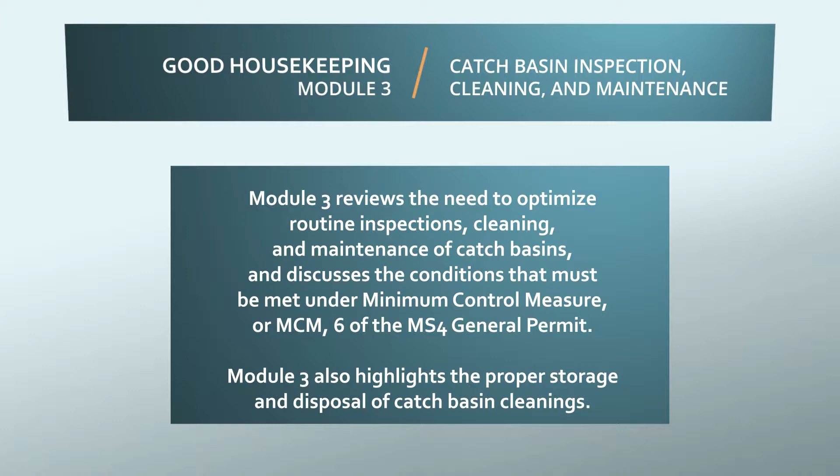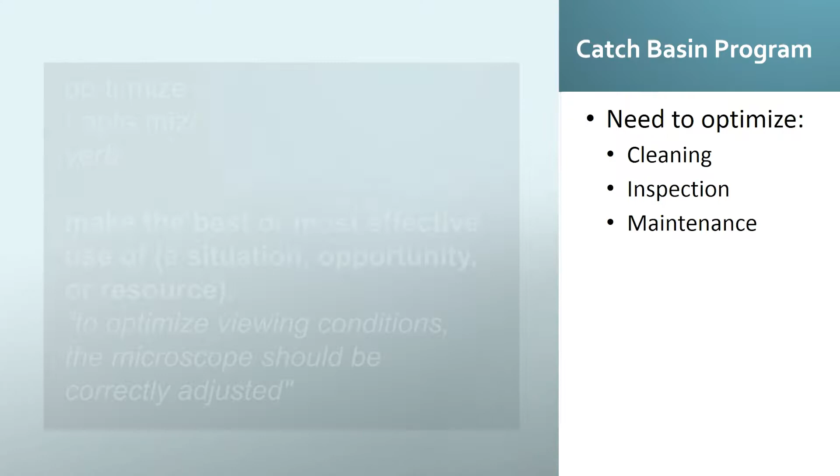Module 3 is on catch basin cleaning, inspection, and maintenance. Your catch basin program needs to optimize the cleaning, inspection, and maintenance of catch basins. Optimize is the key word here—you need to make the best or most effective use of your catch basin cleaning program. That is the definition of optimize.

In MCM 6, one of the requirements is to develop an infrastructure operation and maintenance plan, and included in that is your catch basin program. The Central Mass Regional Stormwater Coalition has developed a template for an infrastructure operation and maintenance plan. It's pretty basic, but it is a start—something you could use as a reference to get started. A lot of customization would be required, but it's a good starting point.

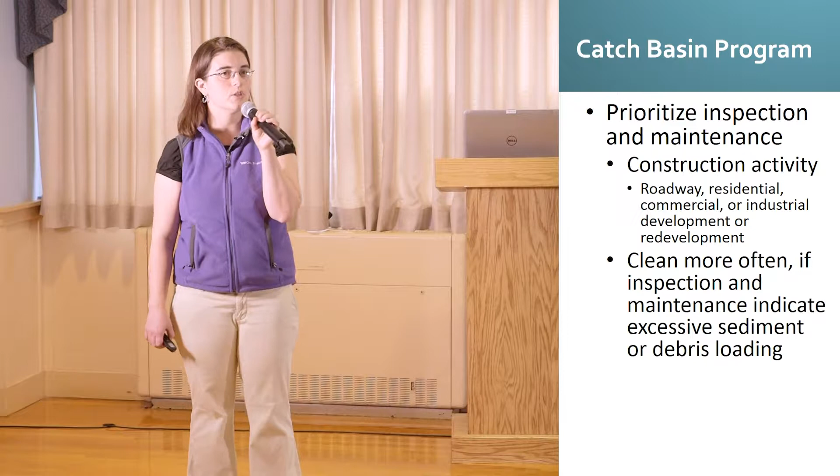Under your catch basin cleaning program, one of the key things you need to do is prioritize your inspection and maintenance. The MS4 General Permit lists certain areas that you need to prioritize, such as areas of construction activity, for roadway, residential, commercial, or industrial development and redevelopment. You need to clean any of your catch basins more often if your inspection and maintenance indicate excessive sediment or excessive debris loading.

Excessive sediment or debris loading is anything greater than 50% of your sump. If the sump is more than 50% full, that's considered excessive, because it will decrease the capacity and function of your catch basin. Part of the sump provides some treatment—it collects sediment in the bottom. So if it's too full, the flow will pass right through and there'll be no deposition of the solids.

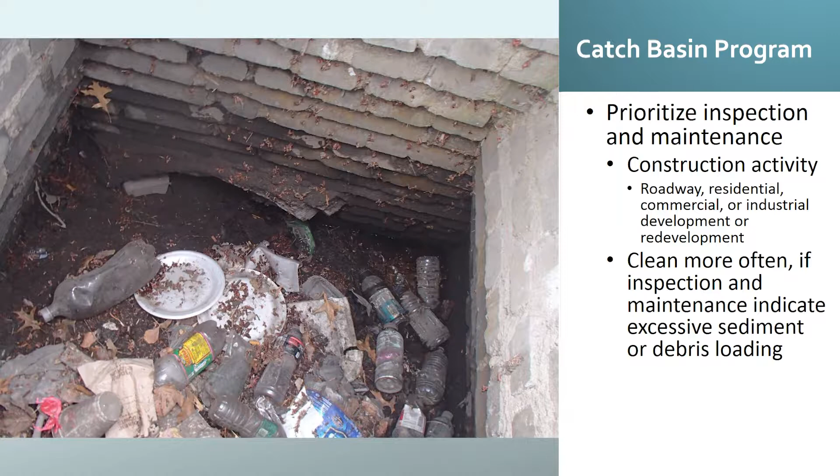So in your catch basin program, you need to have a cleaning schedule. Catch basins need to be routinely cleaned with a goal of having no catch basin have a sump more than 50% full at any time.

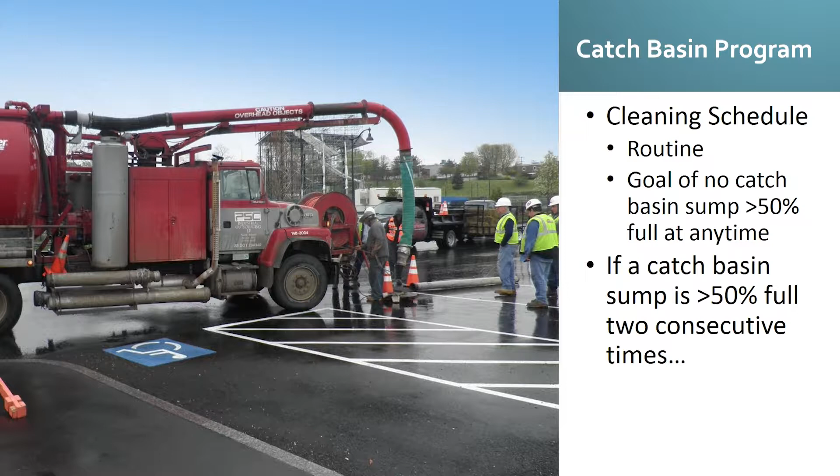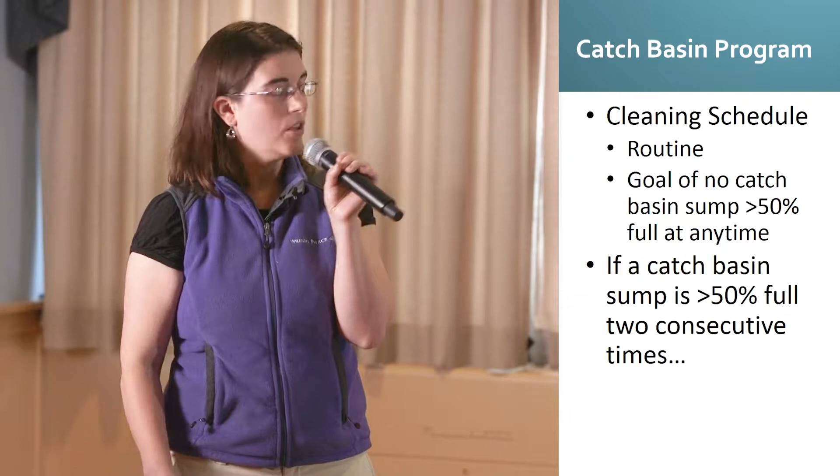If your catch basin sump is greater than 50% full 2 consecutive times—you clean it one time and it has excessive sediment, then you clean it out, and during your next routine inspection it again has more than 50% of its sump full—you need to do additional work.

You'll have to document the findings—that this catch basin had excessive sediment 2 consecutive times. Then you'll need to go upstream and investigate the drainage area that discharges to that catchment or catch basin and look for the sources of the excessive sediment. Once you find the source, if you find it, you need to abate that contributing source to the extent practicable.

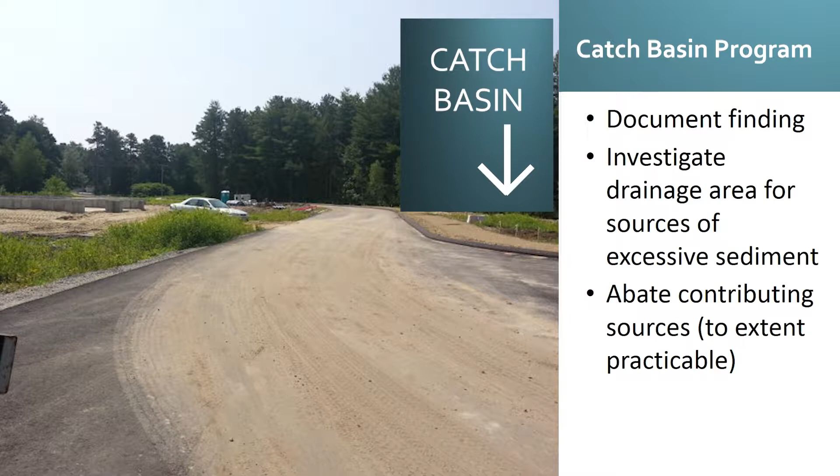Here's an example: say you have excessive sediment, and there's a catch basin located right here. This happens to be a construction site that has excessive sediment track-out, which would be contributing sediment to the storm drain system—a potential source of downstream excessive sediment.

Part of your investigation would be to go upstream, and if you found this instance, you would say, well, this looks like it could be the source of my excessive sediment, and then you'd have to try to abate that source—maybe speak with the contractor on site or the developer and say this needs to be taken care of. You need to have your erosion control practices in place on your site, conduct street sweeping, have them clean it up, and document that.

In general, your catch basin cleaning program needs to be documented. You need to develop metrics and other information that you use to reach that determination—how did you know, and how did you come about in your plan development, that your plan is optimal, and how to optimize that catch basin cleaning to make it the most effective you can for your municipality. And then you need to log your catch basins that were cleaned and inspected.

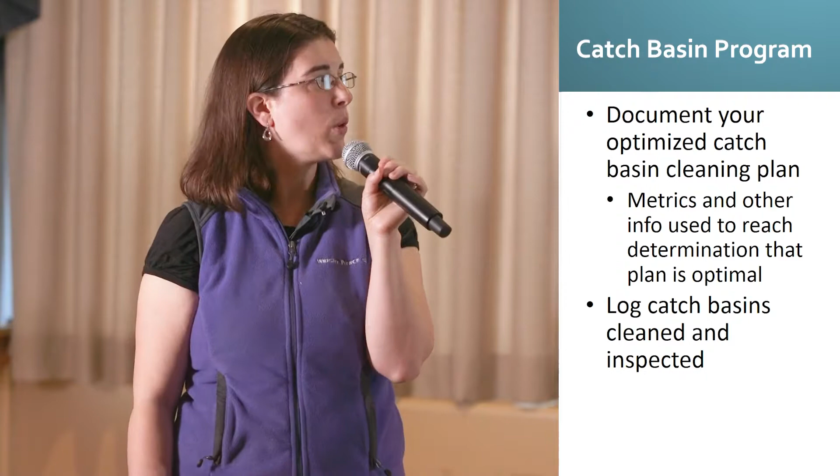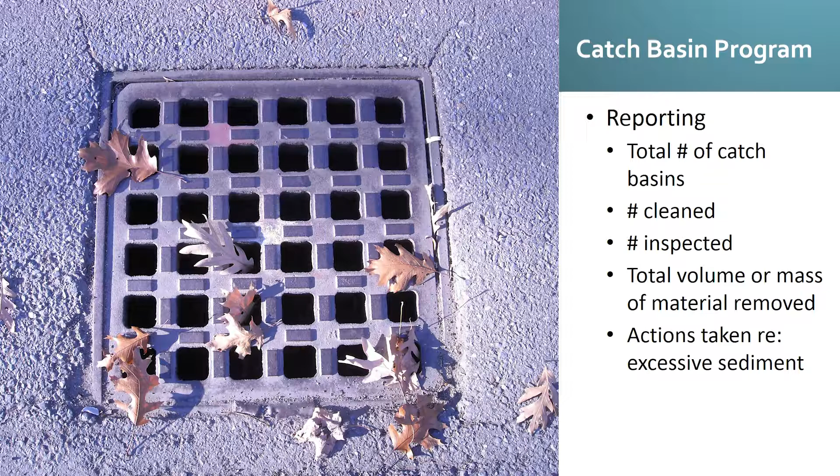Document, log, report, and repeat. So what needs to be reported in your annual report? They like to see numbers in your annual report. You need to know the total number of catch basins in your system, the number that were cleaned, the number that were inspected, the total volume or mass of material removed during catch basin cleaning, and any actions taken regarding excessive sediment.

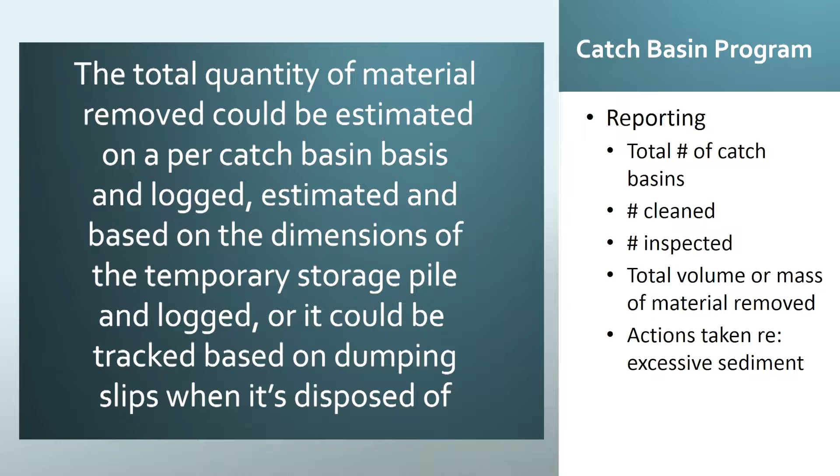The total quantity of material removed could be estimated on a per catch basin basis and logged, estimated based on the dimensions of the temporary storage pile and logged, or tracked based on dumping slips when it's disposed of. So you have your catch basin cleaning program, you clean your catch basins regularly, and then what do you do with the cleanings?

Catch basin cleanings, the residual material removed from your catch basins, are classified as solid waste by the MassDEP. They may be disposed of at a landfill that accepts and is permitted to accept solid waste, but this is for catch basins that are in a complete separated system.

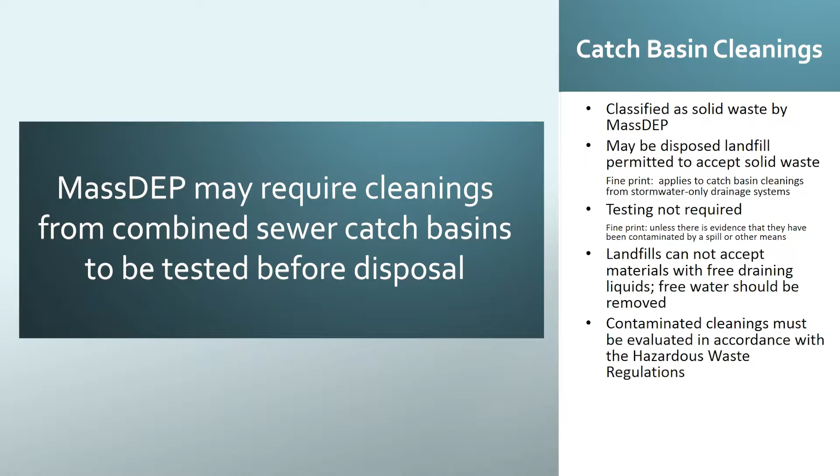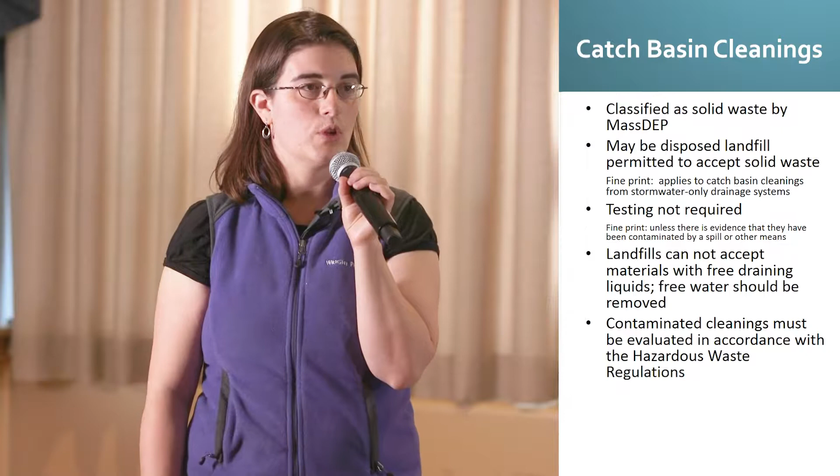MassDEP may require cleanings from combined sewer catch basins to be tested before disposal. Testing is not required unless there are obvious signs of contamination. Say there was a spill in the area that reached your catch basin, and you know there's obvious contamination of the material in the sump.

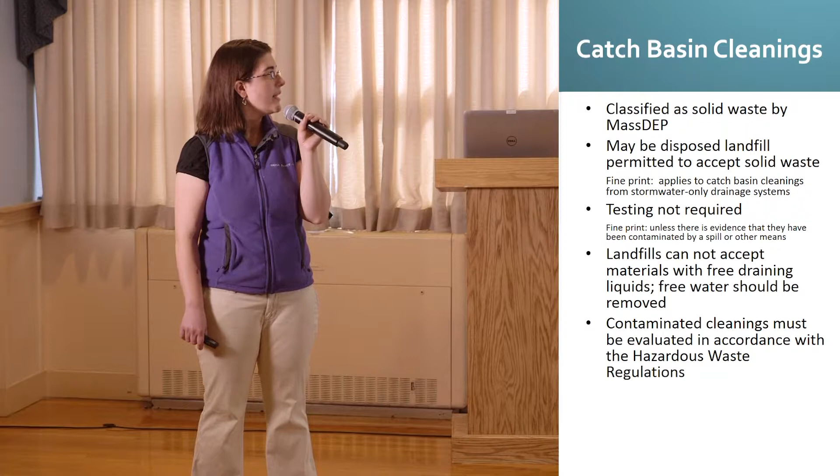Landfills cannot accept materials with free draining liquid, so the liquid needs to be removed prior to disposal. If you have materials known to be contaminated, they must be evaluated in accordance with the hazardous waste regulations. Here are a few examples of how you can dewater your catch basin cleanings.

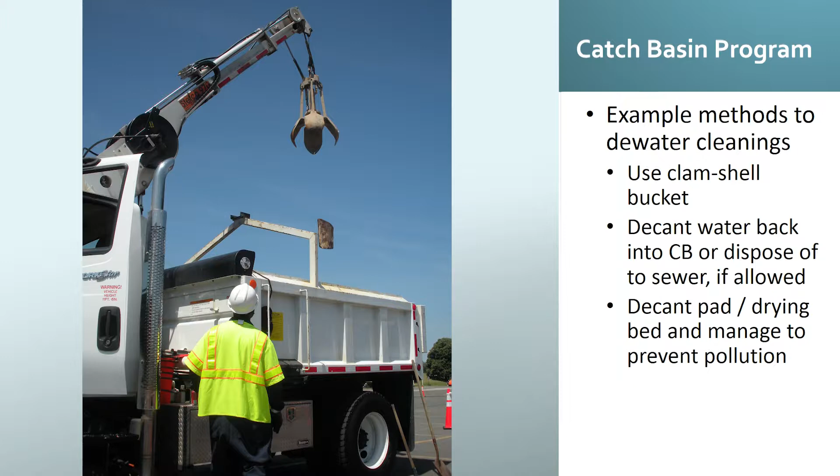One method is to use a clamshell bucket to remove the material. This way you are leaving the majority of the water that's within your sump in the catch basin you're cleaning. You'd remove the material using the clamshell bucket and put it in the dump truck.

You could decant water back into the catch basin or dispose to the sewer if it's allowed. You could also place the materials on a decant pad or drying bed and manage to prevent pollution from the water draining off of the cleanings.

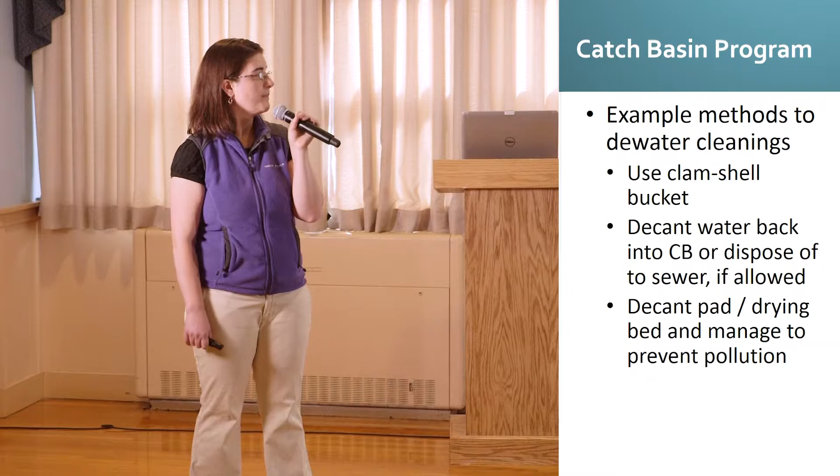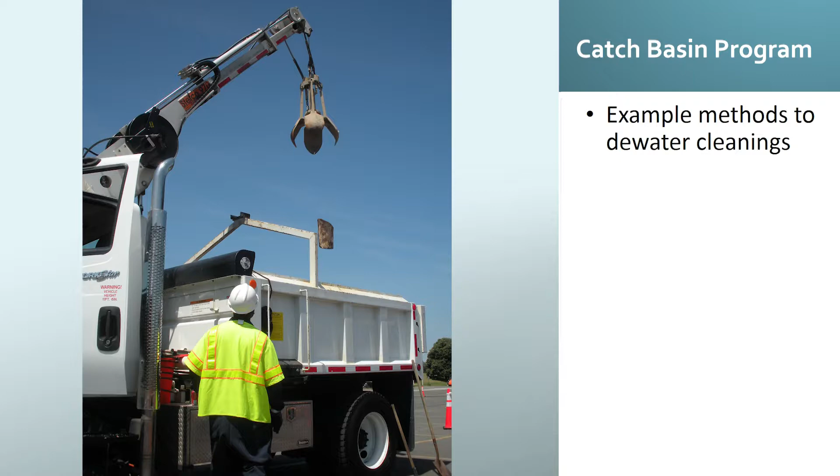Options for removing freestanding water from catch basin cleanings can be as simple as using a clamshell bucket, and after several catch basins along the same system are cleaned, the truck body can be elevated to decant the water back into the catch basin.

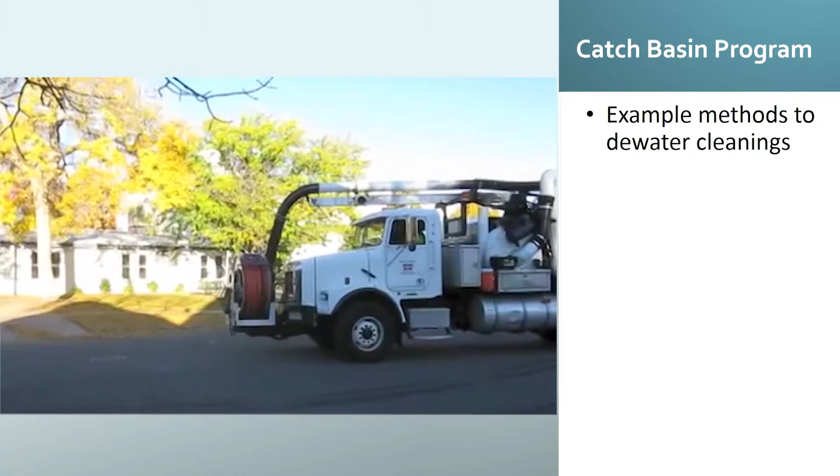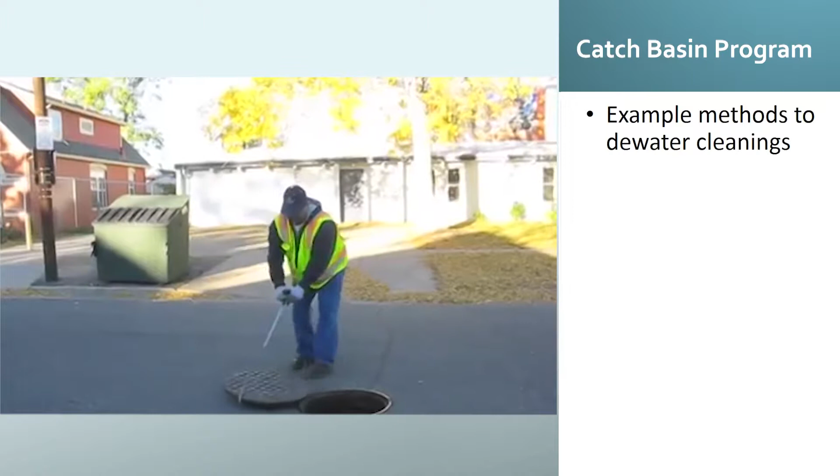However, if your community does not own a clamshell bucket but owns a Vactor truck, the standard practice is to decant the water back into the catch basin or system of catch basins being cleaned. A lot of trucks have the ability to draw the water off the Vactor truck, which would facilitate this.

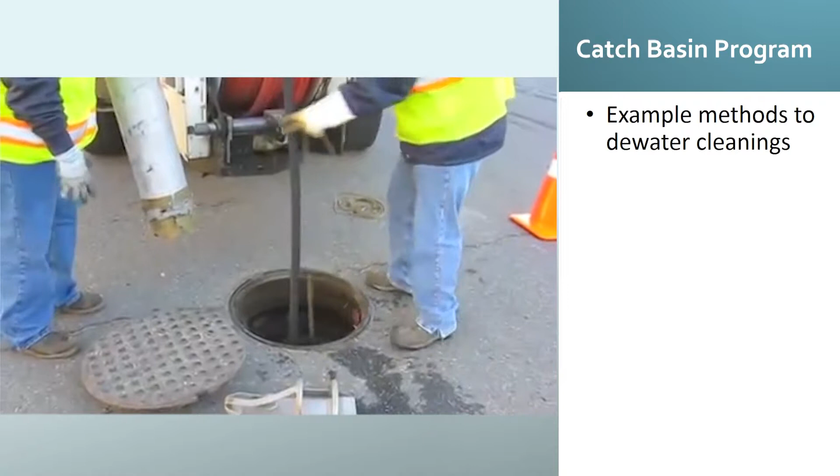Other options include temporarily storing the cleanings on a holding pad, decant pad, drying bed, or roll-off container to allow the water to evaporate or drain from the cleanings. Be mindful of where any draining water flows to and implement measures to prevent pollution as necessary.

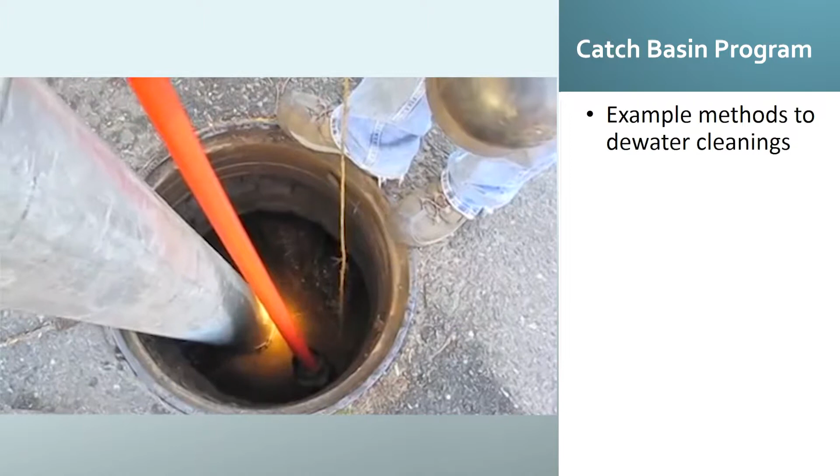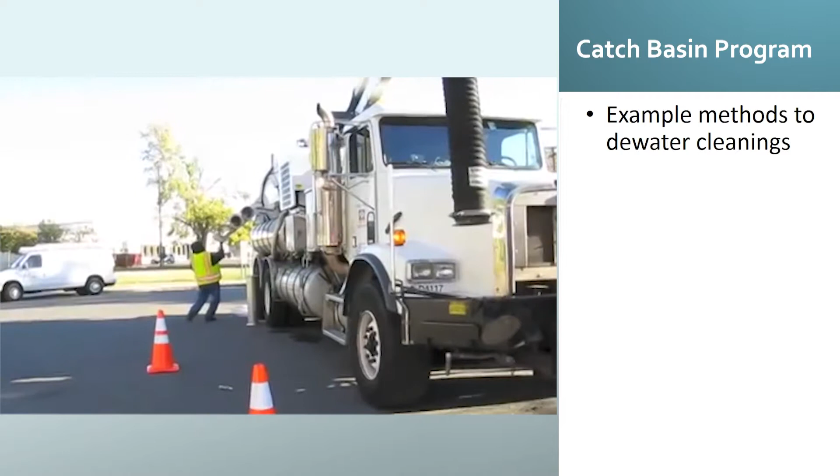The temporary holding pad should be located on an impervious area, and the draining liquids should flow to a catch basin that discharges to a sanitary sewer or into a holding tank.

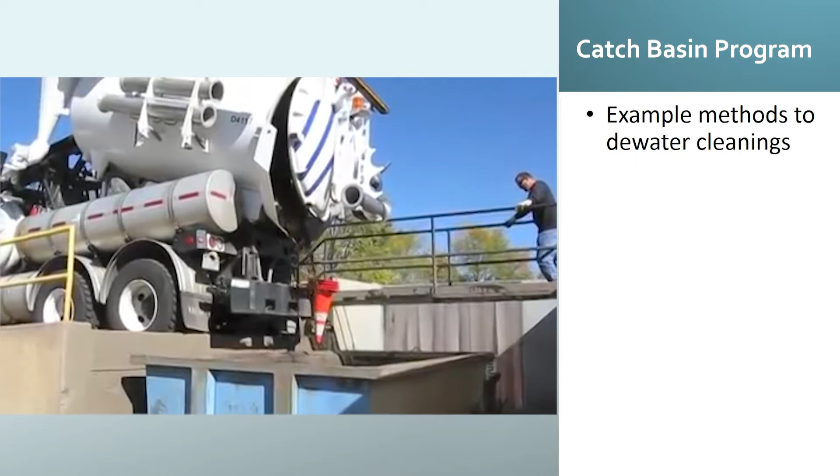Some municipalities have a catch basin cleaning station at their wastewater treatment plant, where the cleanings are temporarily stored on a pad that collects the free draining water, which flows back to the treatment works. Once dewatered, the solids are hauled to a landfill.

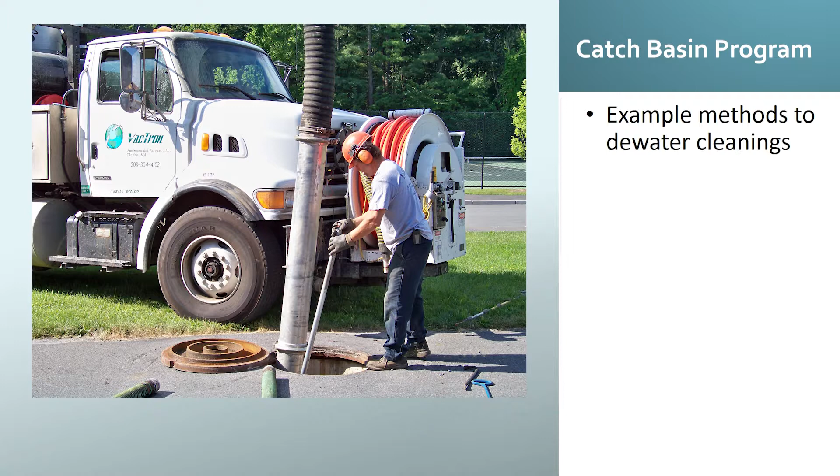Other communities subcontract out their catch basin cleaning. MassDEP may approve catch basin cleanings as grading and shaping materials at landfills undergoing closure, or used as daily cover or grading material at active landfills.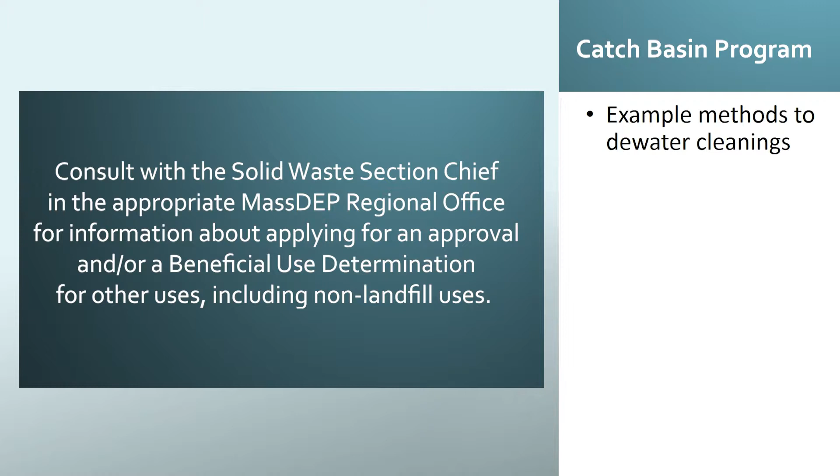Consult with the Solid Waste Section Chief in the appropriate MassDEP regional office for information about applying for an approval and/or a beneficial use determination for other uses, including non-landfill uses.